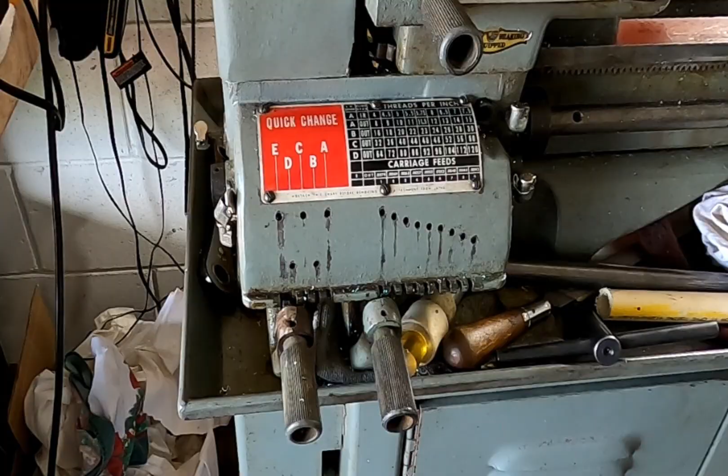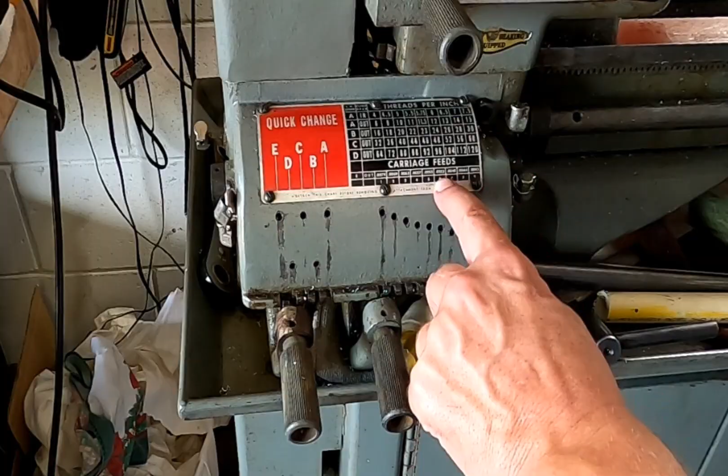So let's go ahead and set up for an easy thread. A 12 is fairly easy, so we're gonna go 12, and that's gonna be A. On this mark here, let's bring that over and up. So we're in line with 12, and then A is over here and up.

Before we get going here, I'm gonna go off camera and put some lube into this thing.

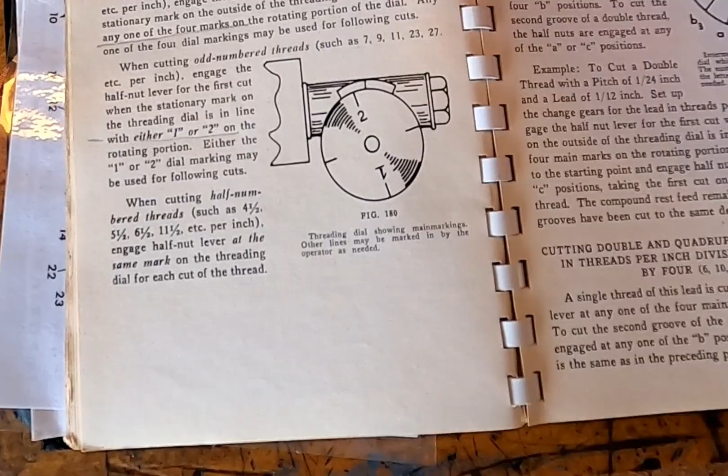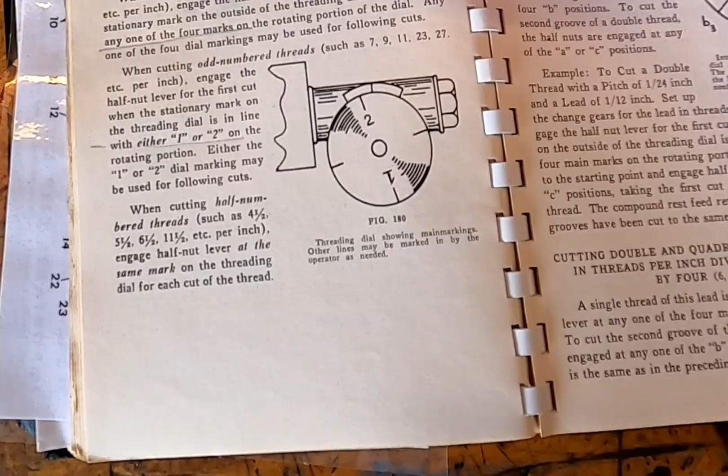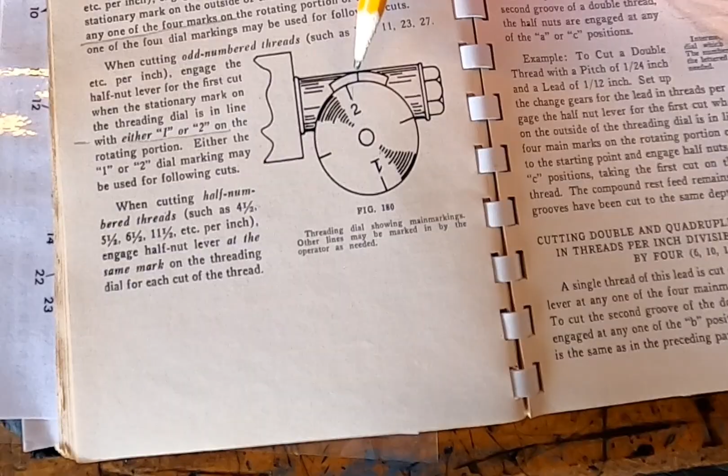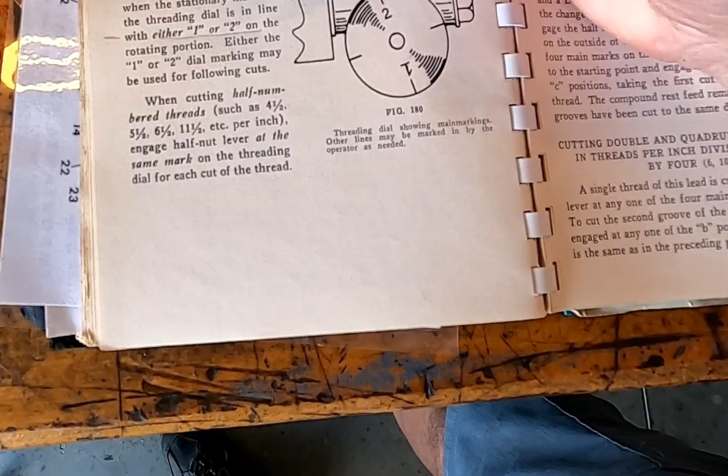Okay, looking at the book here, let's keep life simple. It says for any even numbered thread, you can engage on any point on your dial. When engaging on odd numbered threads, you want to be engaging either on the 1 or 2. Keep in mind the 1 and 2 are always safe, no matter if you're odd or even. If you have a half increment, like a 4.5, 5.5, 6.5, don't even worry about that. I don't remember ever doing one of those threads, but the book says just use the same mark each time.

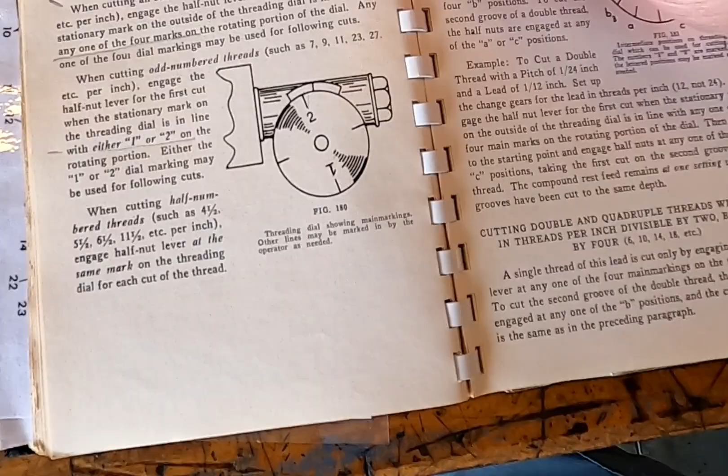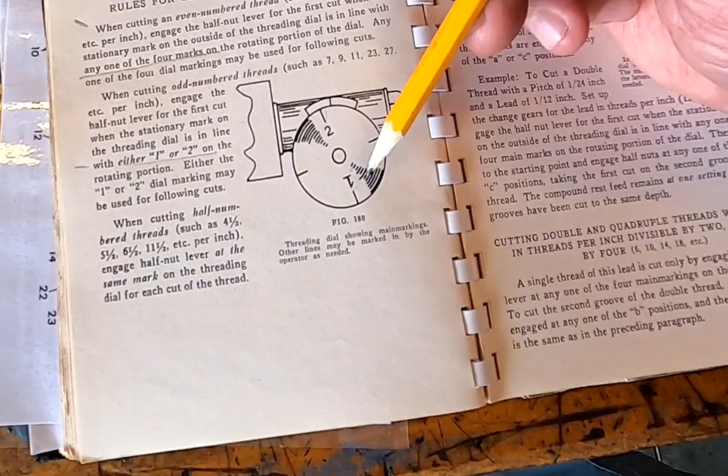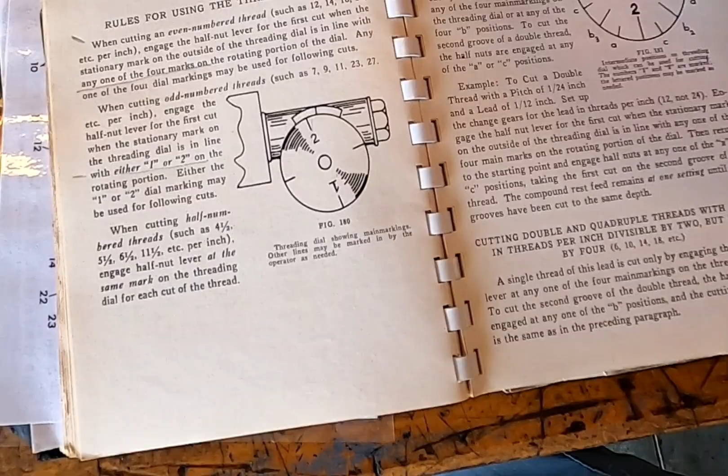So it's really not that difficult. If you're ever in doubt, just always hit the 1 or 2. I usually find the machine comes around fast enough that I just constantly hit the 1, and it makes it easy when I go from machine to machine, I'll just always hit the 1. So unless you're doing some type of production work where absolute speed is needed, that's probably the way to go, unless you want to just go buy a CNC.

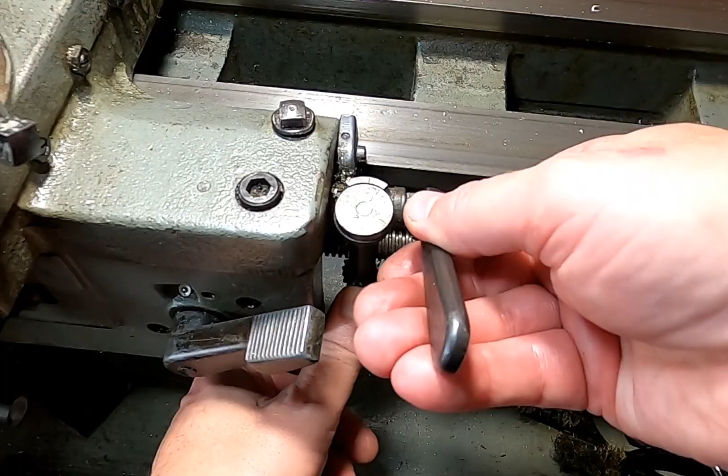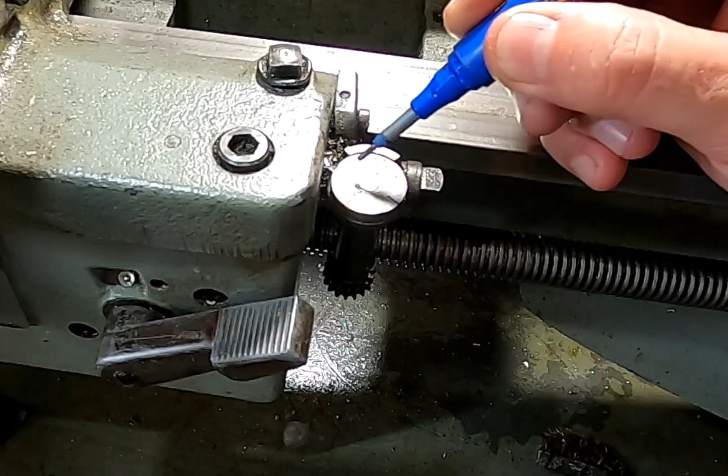On this machine, you actually have to engage the threading dial. So we'll drop it in place, make sure it's in there, and lock it, see how it wants to come out. There we go. So just so we can see this better, let's mark the 1 and the 2 in red, and our marker point in red, and we'll mark the off sides in blue. Now we can go ahead and see what this does for us.

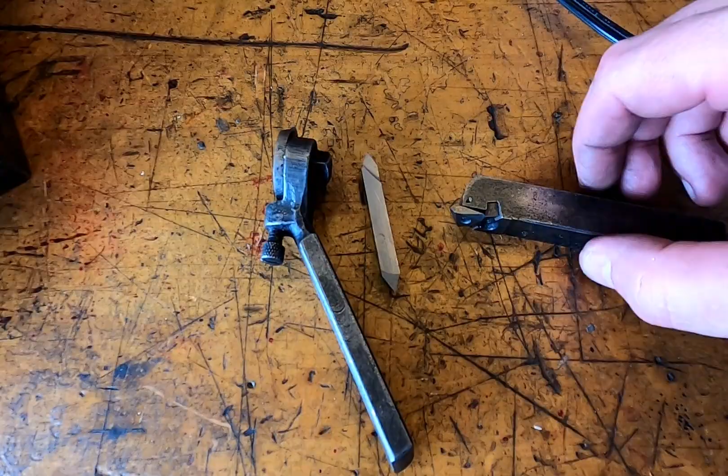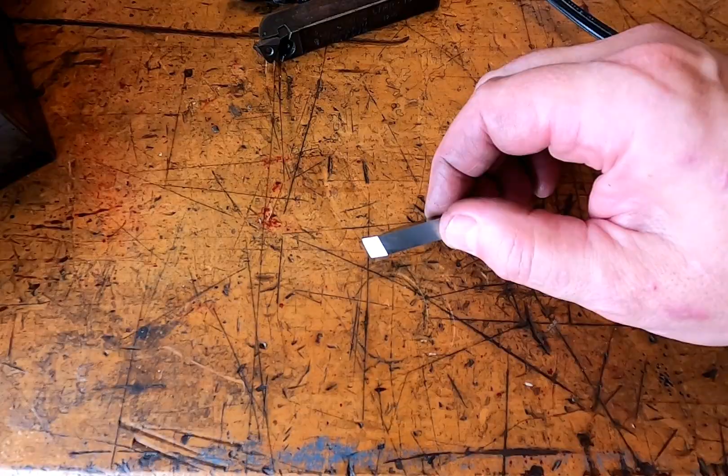All right, you want to pick your poison on what you're going to use for a cutting tool. This one here, I'm never set up for, so we're not going to use that. This is my favorite, the LTMR. I really like this tool a lot, it gets in tight spots, I think, a lot better than some of the newer tools. But we're going to just go ahead and use this high-speed steel today, and this one's ground for both positive rake and negative rake.

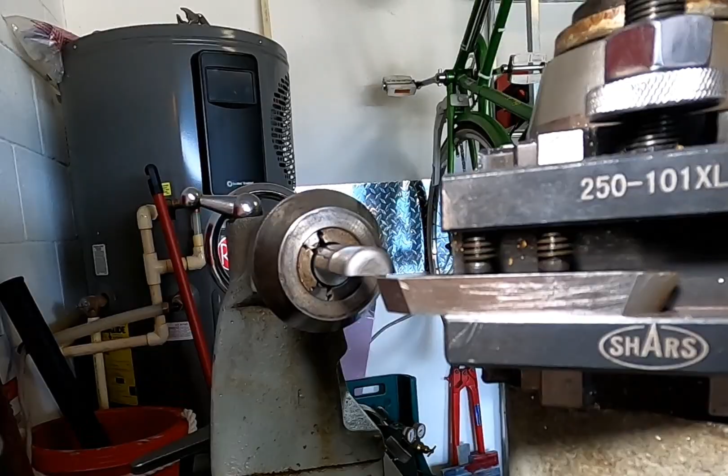We're going to go with the positive. You want to make sure your tool is set to the right height. In this case, I'm using a half-inch ground precision pin, and if I can just go under the edge of the pin with it upside down, I know my tool height is correct.

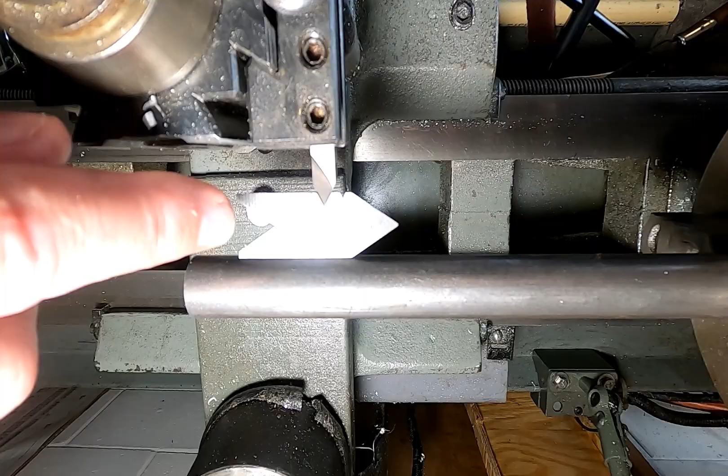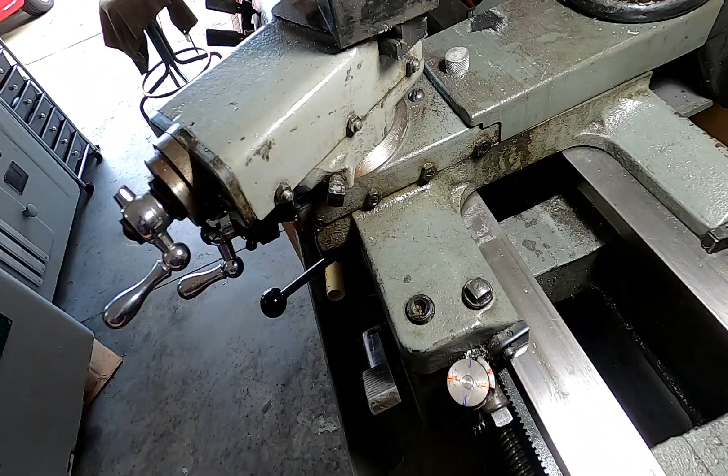You want to make sure that the cutting tool is aligned square with the work you're doing. Today we're just going to do old school right hand threading off the compound, and we're set at 29.5 to 30 degrees on the compound.

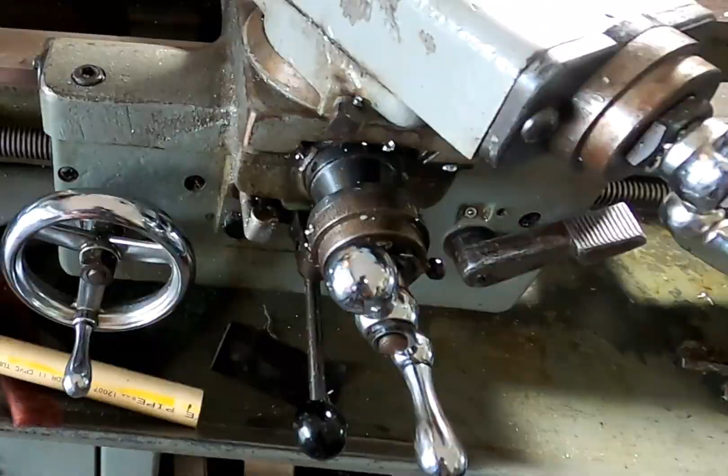Always remember, when we're turning, we always want to have a zero point where we scratch the surface. Now these dials are really crappy, so I put DROs on my machine, and I'll be going off the DRO for the zero point, then adding in on the compound right here every time we make a pass. So let's show you how to get on that.

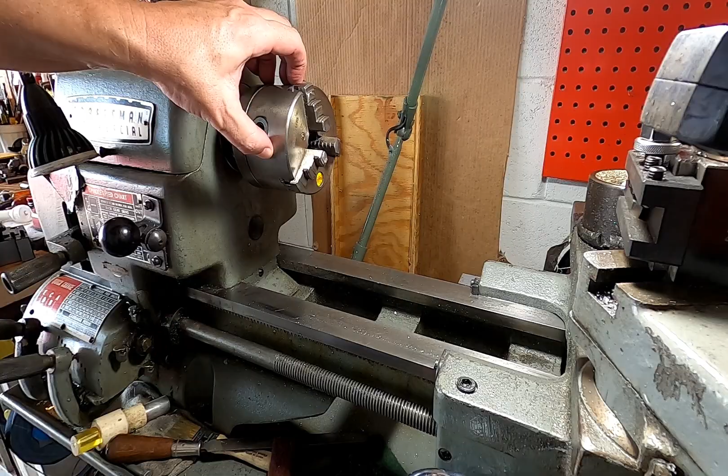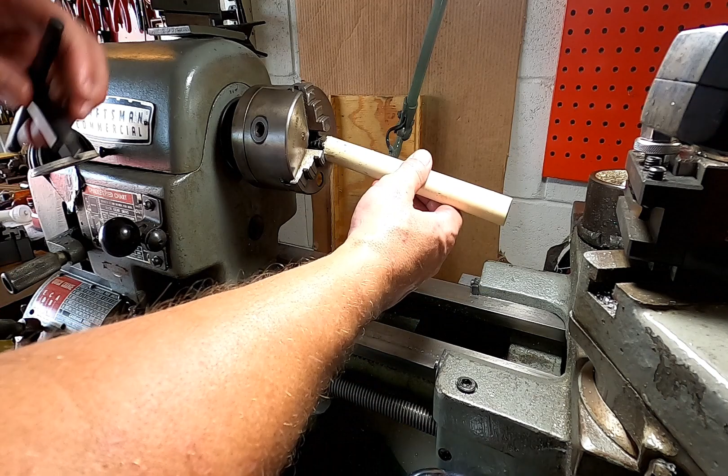The biggest fears people have are, one, crashing, and you can ease that fear by starting with a smaller chuck, because psychologically a smaller chuck you fear less than a larger chuck. And two, start off with some length, and we're going to use PVC here because it's cheap, you can practice on it, and you don't have the fear of messing it up like a nice piece of metal.

So we have a nice amount of length out here on this PVC. We have room to move in. And let's just see what this does.

Just get some Dykem on there so we can see this better. Okay, so we want to come up. We want to make sure that we're just barely touching, and that'll be our zero point.

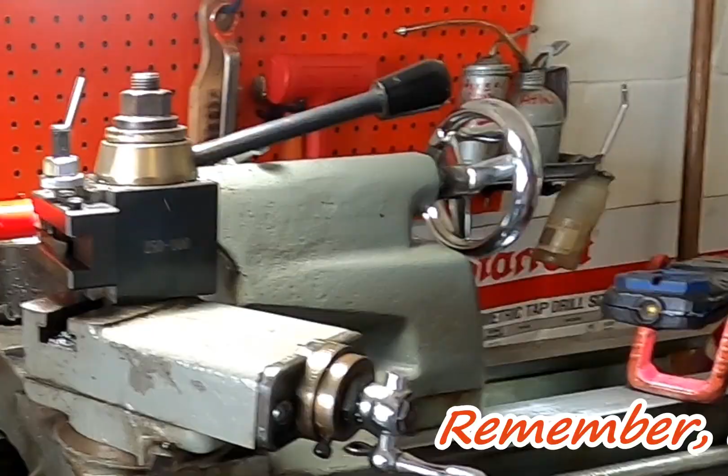This is where people start getting a little nervous, knowing exactly how much to come in. Don't worry about it, just give it a little turn, just a couple thousand, see what happens. I mean, we're just practicing, right? So we'll wait till she comes around onto the 1. And look at that, we're threading.

And back out. Notice I didn't have to give myself any run out on this, no run out whatsoever. That's the beauty of PVC, you don't really have to worry about those things. And I'm on a controlled speed knob here, so I can slow this down just a bit.

And we're going to bring it in. I'm not even looking, I just bring it in maybe 1 thousandth, 2 thousandths, 3 thousandths, who knows. And here we go, another pass. And voila.

And back to 0. We're going to bring in another thousandth or so here and see what happens. Whoop, I missed it. Luckily I had a little bit of space there, right? Let's do it again. And there we go.

Bring it out away from the 0. Bring it back, I'm going to bring it back into my zero. I'm looking at the DRO here, I can't really see those dials anymore. Then we're just going to bring it in a little bit, I'm not even looking at that, I'm just doing it by feel. Let's bring it up around till we hit the number 1 again. And 1.

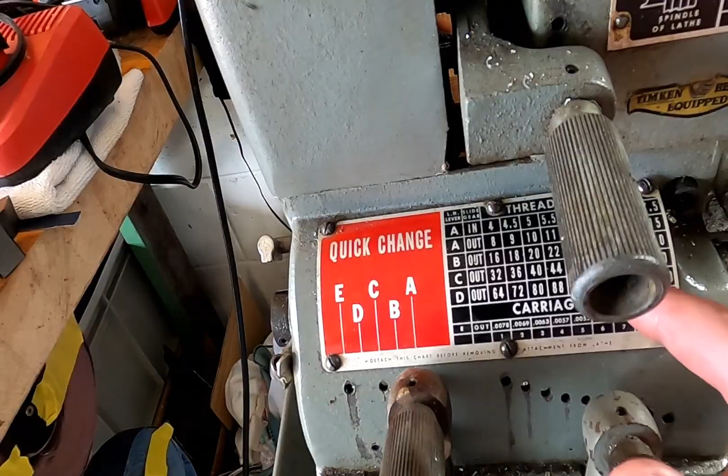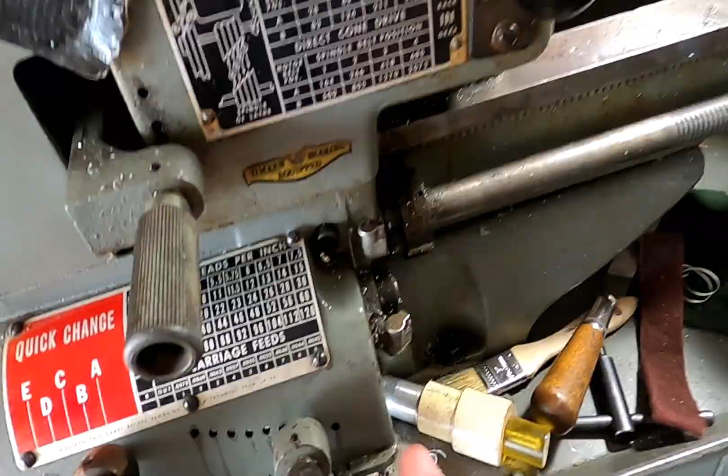Let's change our gearbox down to a 13. We can do that by moving over 1, we're going to move it up into 13. And let's see what happens when we thread at 13 on a 12.

Oh no! We just seriously ruined those threads. But you know what? It just doesn't matter, because this was practice. And that's why we do practice.

What we did prove through all of that is that we can run a perfectly good thread just as long as we're hitting any one of those indicators on the thread dial.

So we've practiced on that PVC a little bit. Now we're ready to do some real threading. One of the things you take into consideration when you're going to thread something you're actually going to use is your major diameter. You always want to start with your major diameter. But we're just practicing, so we don't really care about that.

You can use any size stock you want just to practice on. As a matter of fact, let's say I took a piece of this 5/8 stock here and I was going to make a 5/8 bolt. I would already be at my major diameter. Let's say I had to take it down to 1/2 inch before I started threading. Well, guess what? I have all that right there that I can practice with before I go down to 1/2 inch. I can come in here and thread that over a couple times just to get some practice, make sure it's going to roll. So normally I would practice on that.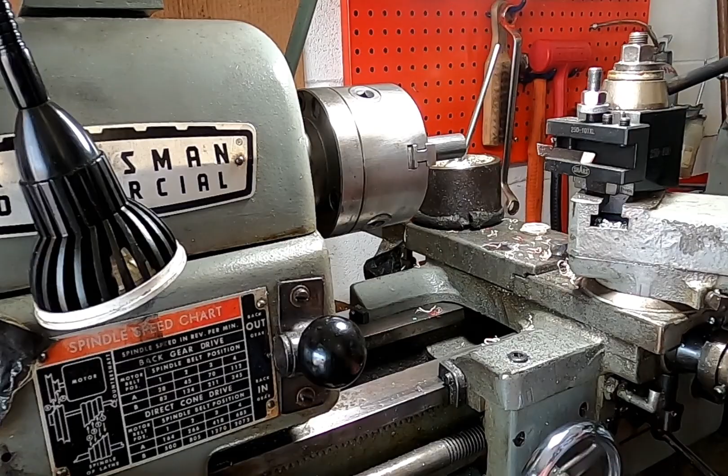Now, after we just did the little run with the PVC, we had this in high gear, and that threading tool was rolling right along pretty good. If that makes you nervous, you can, and I would, drop this into back gear. When you're in back gear, you have more power to cut with, and the threading goes a lot slower.

Now, we know that threads cut faster tend to look nicer, but you know what? Let's not worry about nice right now. Let's worry about threading.

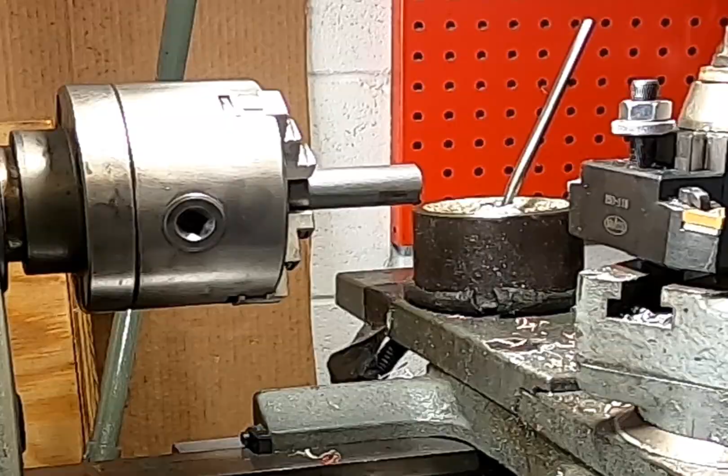So what we're going to do is come up here and run approximately a 1-inch thread down through there. But before we get started, we're going to put a little chamfer on this end here.

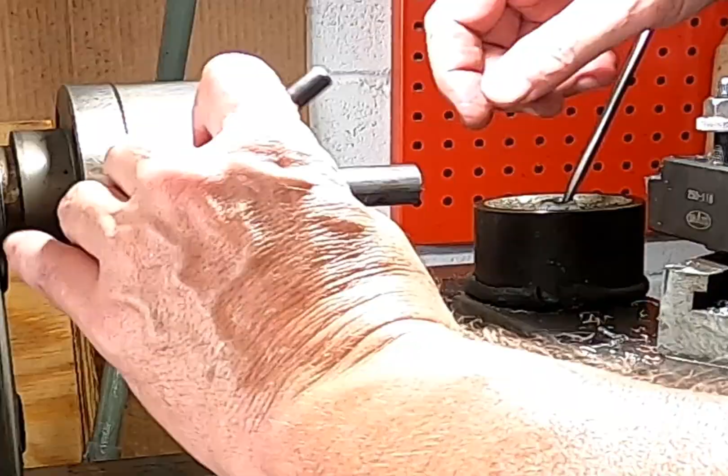And we're going to leave some space for some run out. Let's say we're going to put 1 inch of thread. Well, guess what? We're already nervous that that's going to be rolling too far. So let's try this: let's back it out and move this out, giving ourselves approximately twice the space we actually need for this.

And then we'll bring a live center up into it like this, and this will stabilize everything. We said we need some run out. Well, let's give ourselves some run out. Let's say we need 1 inch — let's give ourselves more than 1 inch.

This gives us room to catch threads that we may not get the dial on correctly, and we can just cut off at the end if we have to. So how much run out do we need? Well, that's up to you. How deep do you need it? Well, you want it deeper than the thread that's going to come out.

And maybe we should round that out just a little bit. So let's put a tool in there to round it. A little oil might be nice.

We're new, we're nervous. Let's go ahead and put this into back gear so we can slow it right down. Okay, we're in back gear, so it should move nice and slow for us. A little bit of oil.

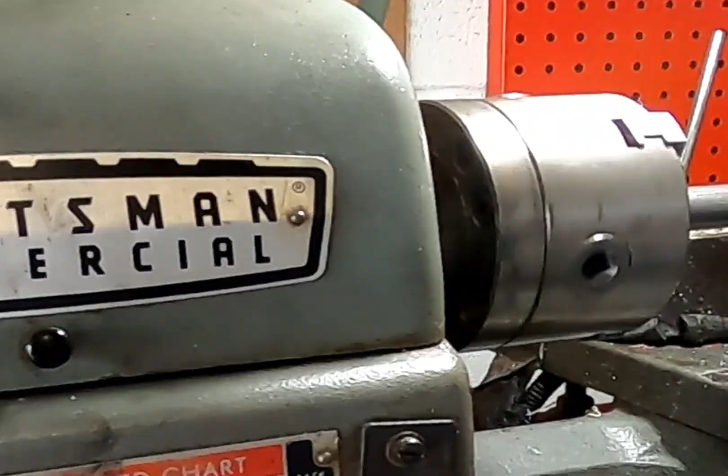A little bit different angle here. Okay, let's see if we can hit that on the 1. Let's see if we can hit that on the 2. Oh, we missed it.

Let's see what happens when we hit 1. Let's see what happens when we hit 2. Very good. Now let's see what happens when we hit any number. Very good, very good. And if we miss, oh no!

All right, so we're gonna come in a couple more thousandths. And I just missed the 1, so let's go around to the 2 and see what happens. And there we have a nice cut. It's in the same groove. And plenty of time.

Pop it out, move it back, and bring it in. At this speed and at this distance from the chuck, I don't worry about crashing. I've given myself extra on this end that I can cut off later in case I mash those threads. If I miss that and haven't paid attention, I can always cut that back.

I only need that much thread, but I've allowed myself extra, which we'll take off at the end. And we'll come around and let's do it on the 2 this time. Oh, gotta bring it in a couple thousandths. 2. And it just rolls along, making this nice little thread.

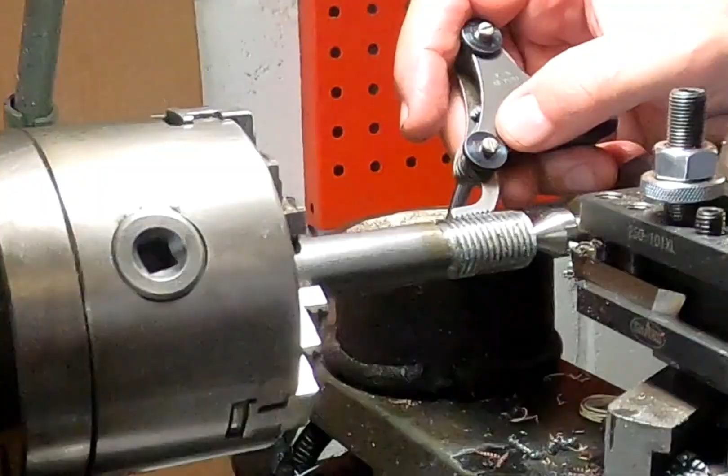All right, let's take a look at our progress. And as you can see, we're making a nice thread in there. A couple more passes, we're gonna have a nice 12 TPI on a 5/8 shaft. Unfortunately, I don't have a 5/8 nut to put on there, 12 TPI, so there's no way to really test it. But this is just practice.

So let's do it one more time. All right, let's zero it. I'm zeroing on the DRO, my cross slide. And bringing in a couple more thousandths. And we're gonna hit it on the number 1.

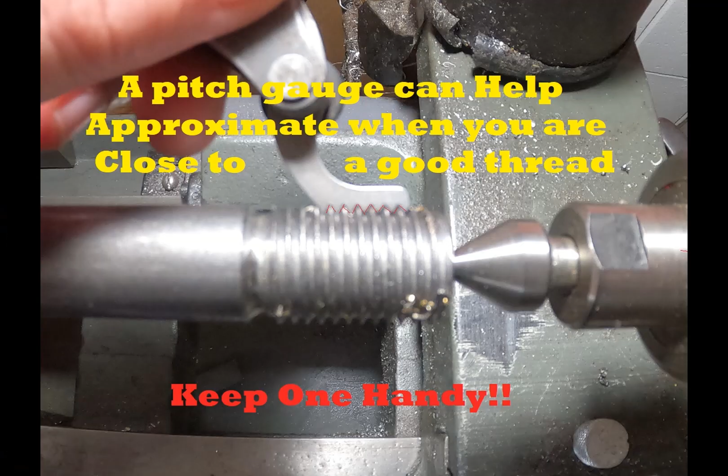And that time we got a perfect 12 TPI thread. So, and that's per the threading gauge. An actual nut you'd want to use, and you'd want to sneak up on that if you were really doing this for a thread.

But basically it boils down to this. When you're learning to do this, give yourself some space, give yourself some extra. I actually purposely messed up those first 2 threads there, and they didn't come out too bad at the end because I had to

cut deeper, so it cleaned up the threads that I mashed. But I've got more thread here than technically I would need because I gave myself more space. I gave myself space to mess up on the end of that thread. So try to keep that in mind.

The small chuck, like I said, that's psychological. Once you get past all this, any chuck or collet that you want to use is going to be just fine. But if you've got more than one chuck, I would definitely start with the smallest chuck you've got. Practice on some PVC, give yourself the space, and it just all falls into place.

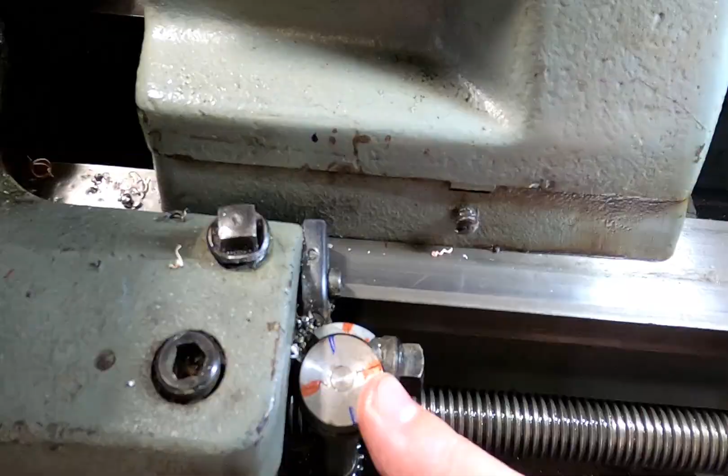I think a lot of it's just getting by your dial and hitting it right. Once you've practiced hitting that in and out properly, it's like old hat. As far as hitting the numbers that you need for the threads, you know, odd, 1, 2, even, all four, at least on this machine. So just kind of keep that in mind. If you're ever in doubt, number one always.